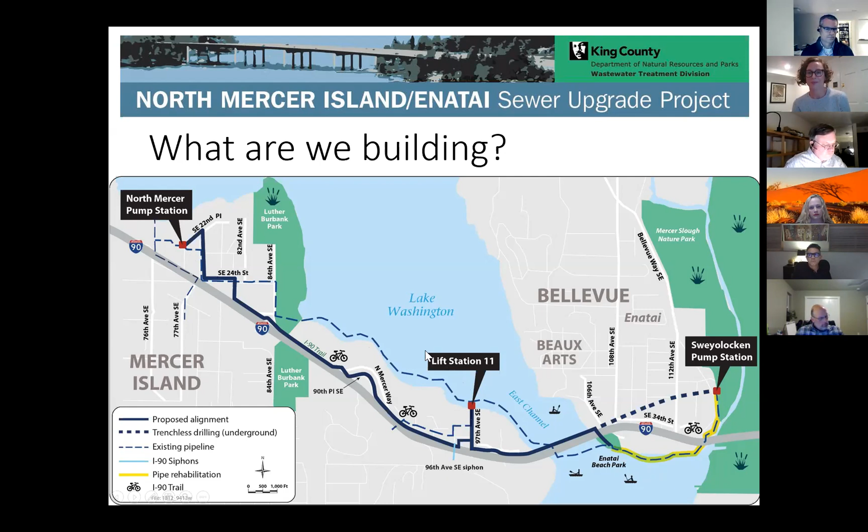We will be wrapping up final design first quarter 2021, and we are going to be advertising for construction in spring 2021. We anticipate having our contractors on board by fall of 2021, with construction running through 2025 into 2026.

Site zoning: King County has completed the lot consolidation process with the City of Mercer Island for our North Mercer pump station property. And I think that concludes the project overview. Andy, I will turn it over to you.

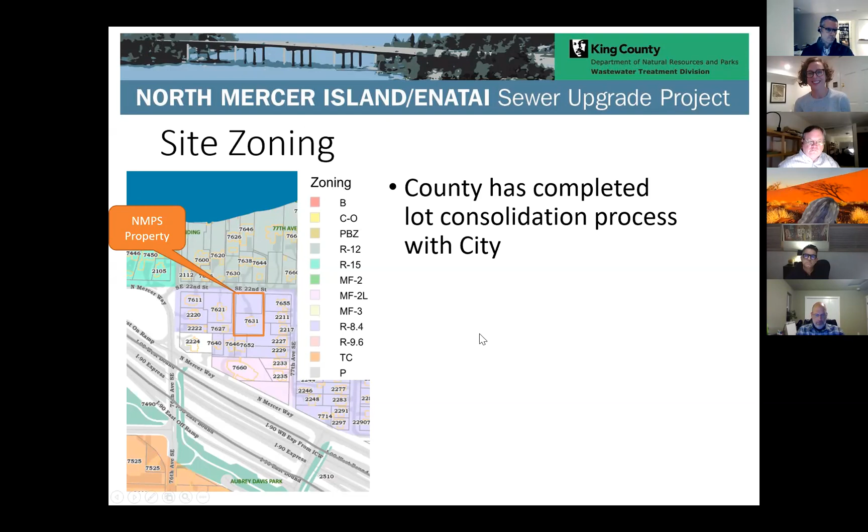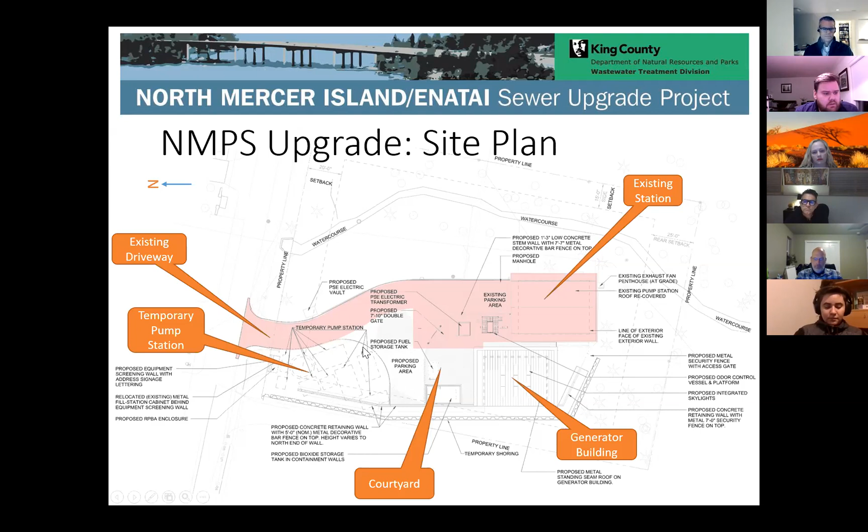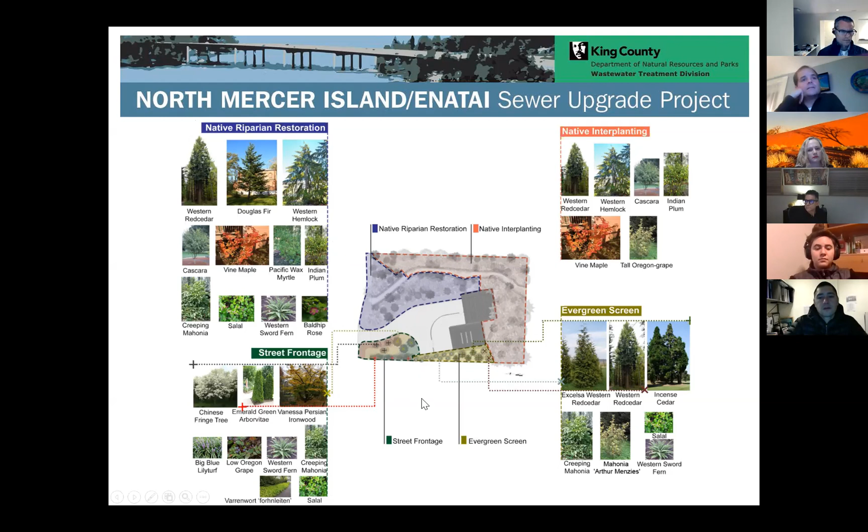We just list the plants by their symbol, and the board shows the plant selection used in the design, and gives some representative images to give you a sense of the character, the form, the look and feel for the different plants selected.

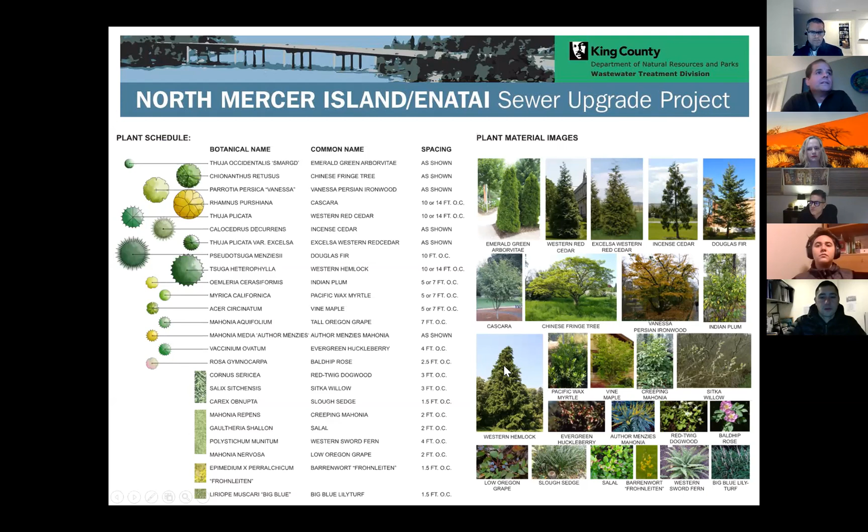And finally, James, the last slide, we have a diagram showing the site lighting. I want to point out the three different lights being proposed.

We have the yard light on the left, which lines the driveway. We have the building mounted lights in the middle there, and those go around the pump station and generator building. And lastly, we have these two small uplighting lights located in front of that entrance wall, providing a little bit of uplighting to make that visual sign.

And the last thing to point out, that red outline is the limits of the visible light. So this conveys that the foot candles are kept within the property boundary and won't spill out beyond that property boundary.

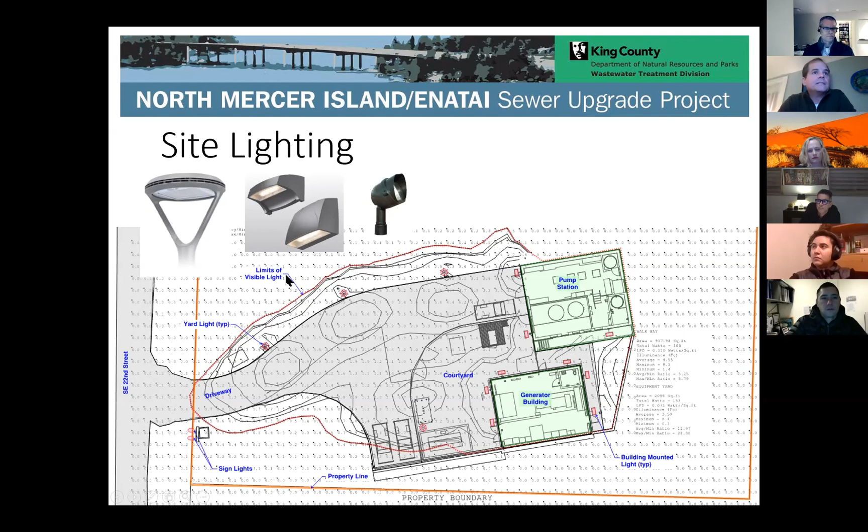And I believe, James, that concludes our hopefully short presentation to give you reacquainted with this project.

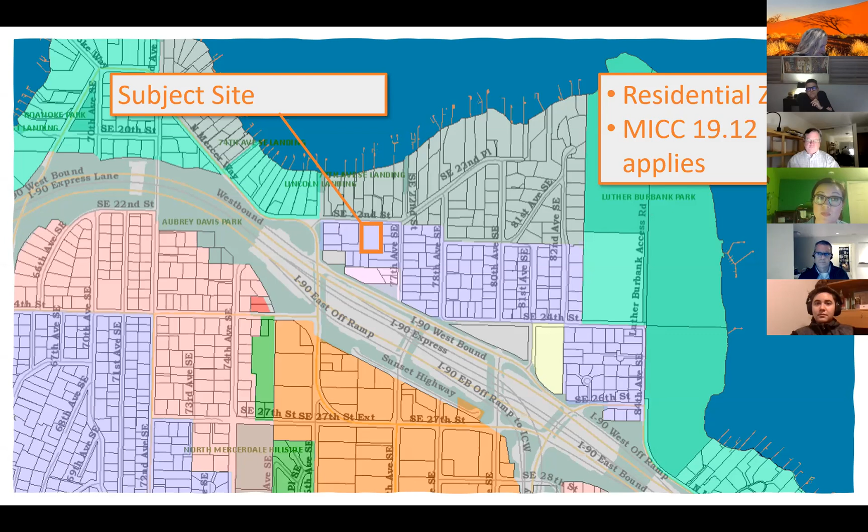The applicant did have a study session with the Design Commission last year, at which the commission offered feedback which the applicant has incorporated into their revised design. So again, it's Mercer Island Code 19.12 that applies in this case, and that chapter is organized by topic, with each topic having stated objectives, which read like principles or purpose statements, followed by specific standards.

Sorry, my cat always comes in at the worst time.

The code also states that where a code standard says a standard should be met, the specific standard is mandatory unless the applicant can demonstrate an equal or better means of satisfying that standard and the objectives of that section. Otherwise, if a standard says 'shall be met,' then that standard is just mandatory.

There are a few areas where the 'should' statement or the 'should' route was taken, for example, around standards related to outdoor covered gathering spaces, which are kind of an awkward fit for a utility building.

As described in the staff report, the proposed design meets all of the applicable design standards for this type of building. I've just summarized a few key topics here.

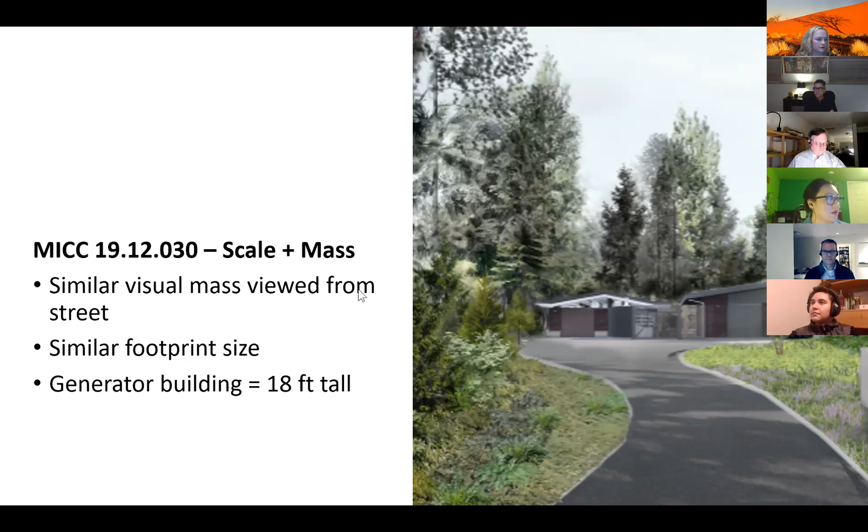Second, materials are required by code to be high quality and durable. They should be used with consistency on all sides of a building, and they should highlight architectural elements such as doors and windows. The proposed design achieves this by having durable materials like brick, patterned board form concrete, and metal.

There's roofing and then louvered metal proposed for the building. These are materials that do not degrade easily. They have a long lifespan, and a similar material palette is used for the generator building as on the existing pump station site, so that creates a consistent, similar look and feel.

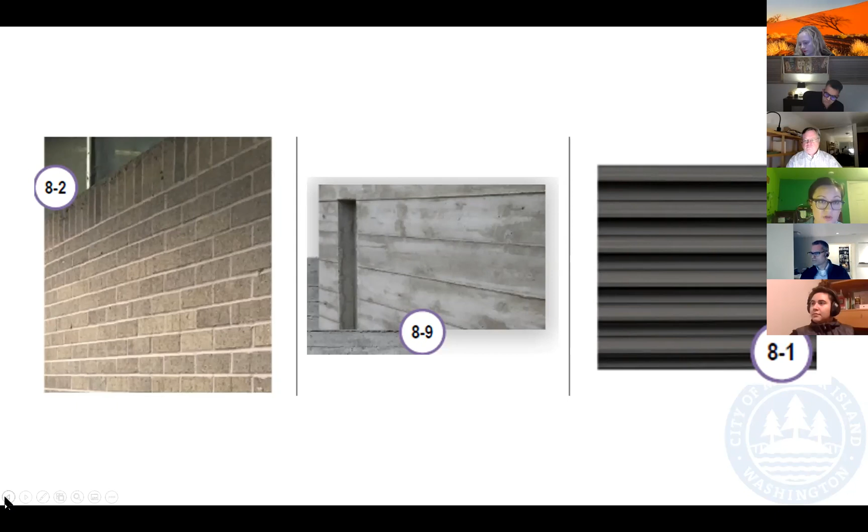The proposed materials are used on all sides of the proposed generator building as called for by code. And lastly, the materials are used in a way that highlights architectural elements of the building—doors, roofing—it breaks up the facade so that there are not large unmodulated blank walls.

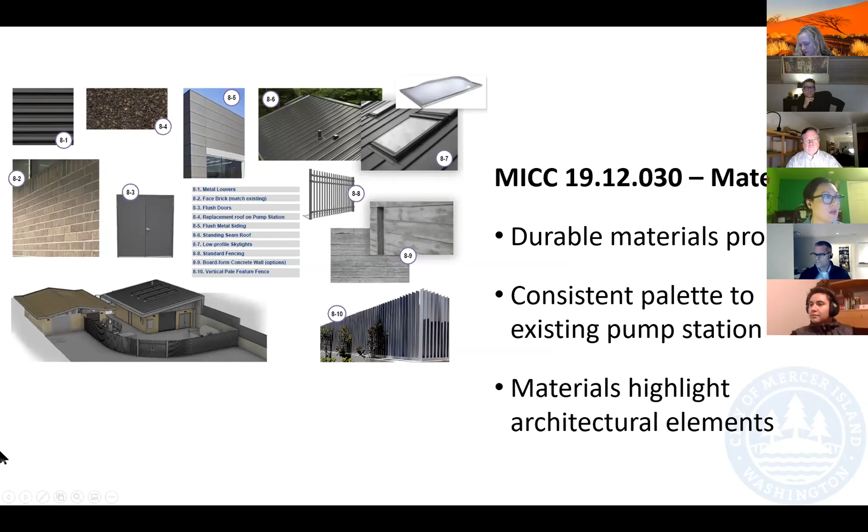The last item is screening. Screening is a requirement of code. In this case, when a utility use is next to a residential use, 20 feet of screening is required. This is another case where it's a 'should' statement, meaning that if the objectives of the code are met with an equal or better alternative to the standard, the alternative is an acceptable way of meeting the code.

In this case, the 20-foot standard is comfortably met on the east and south sides, which are on the top and the right here. But there's kind of a pinch point on this western edge.

This is in part due to the siting of the turnaround and the new generator building. The site has a water course on it, which is this blue streak up at the top. The proposed generator building and turnaround are sited to be as far away from the water course as possible, which is exactly what the city's critical area code requires. It directs development to avoid impacts to critical areas and generally be sited as far away as possible from critical areas.

To meet the screening standard, there's both that decorative fence described earlier proposed together with a dense line of coniferous trees. So together, those measures would create robust screening—not completely opaque, not a solid wall. It avoids that compound effect, but together they provide effective screening and satisfy the city's code standard for screening.

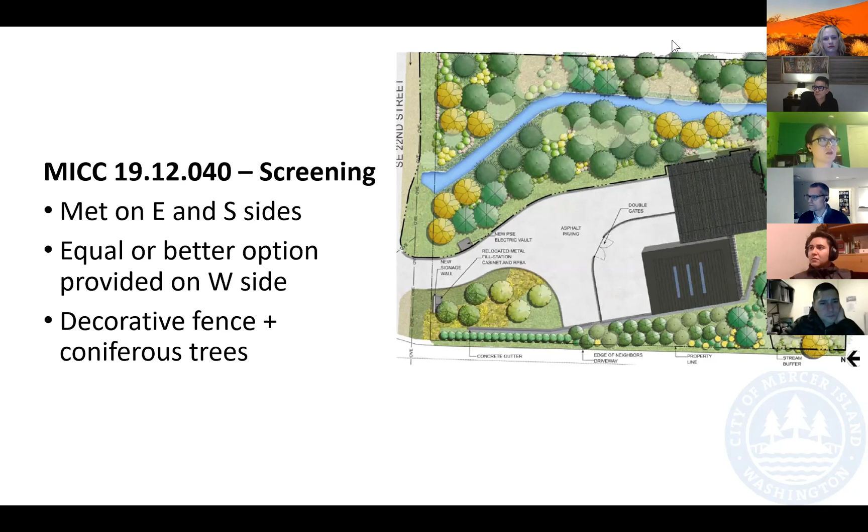Robin, would you like me to share my presentation? That probably makes sense, absolutely. Here you go.

You want me to take that question as well, James? Sure, Andy. Yeah, so this is Andy from Jacobs. Some of the images in here, we've kind of dropped the opacity of the materials a little bit to be able to see through on the renders.

You're quite right, with the viewing angles they're placed pretty close together, and they're quite a wide slat on the fence. So what we wanted to make sure is that as you're walking or driving past the site, you do still get those glancing views of the service yard area in its entirety. With it being on a radius as well, that's obviously going to help screen off to the sides a little bit more when you're looking at it straight on from the street. But it really is just those glancing views through it.

So as you kind of transition along the street frontage, this image shows it pretty well. This is viewing from slightly further to the east of the site. So this is on our driveway looking almost directly at the generator building at the gates. It really depends on the angle you're viewing this, the service yard area and the fence that's immediately in front of it.

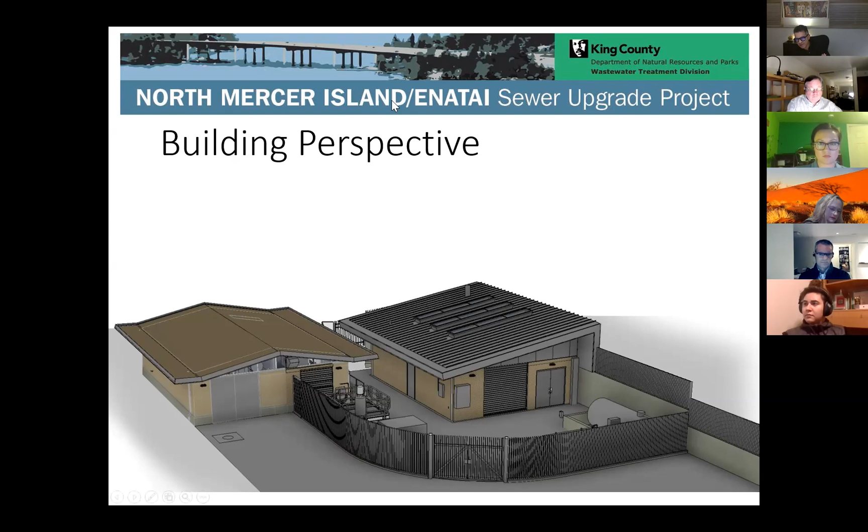What I don't quite yet understand is from the adjacent property - I think it's a 2-story house on the other side of the retaining wall - do they have a sight line to the roof of both the old and the new building at the same time? Is there an opportunity for a sight line? And if there is, I can't tell what the vertical height is on this render.

If it's 8 feet - looks like that's at grade. Right, no, that looks like it's taken from grade, not from a 2nd-story bedroom or something like that. That's what it looks like to me. It's really hard to tell.

But just if there is the opportunity or possibility for sighting from a 2nd story from an adjacent neighbor, is there an opportunity to have the roof colors be more closely matched? Not suggesting complete similarity or exact material match, but from the renders it looks like it's gray, even though it's called out as a bronze color on the standing seam, and then a ballasted type roof in dark brown. So just taking advantage of the design team being here to talk through that. Is it a rendering item, and do you think we'd end up with something fairly similar? So if we were to see this from the neighbor, would it feel more like one consistent presentation of roof materials rather than two individual buildings?

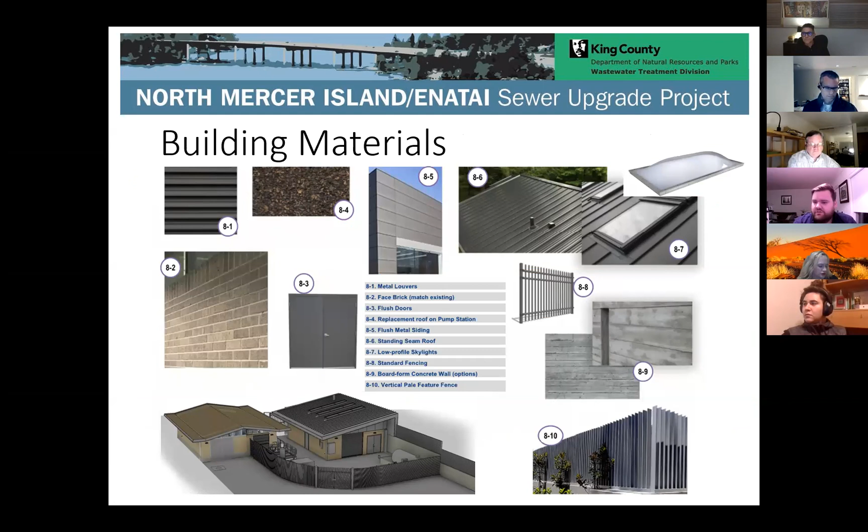So that is the intent - the next step on from this, when we get a contractor selected, is to actually look at physical materials and put them side by side and make sure we get material matches that are complementary to each other. And like you say, with the concern you raised, making sure we have that robust palette of materials with these earth tones and making sure they match up and work well together. Okay, great.

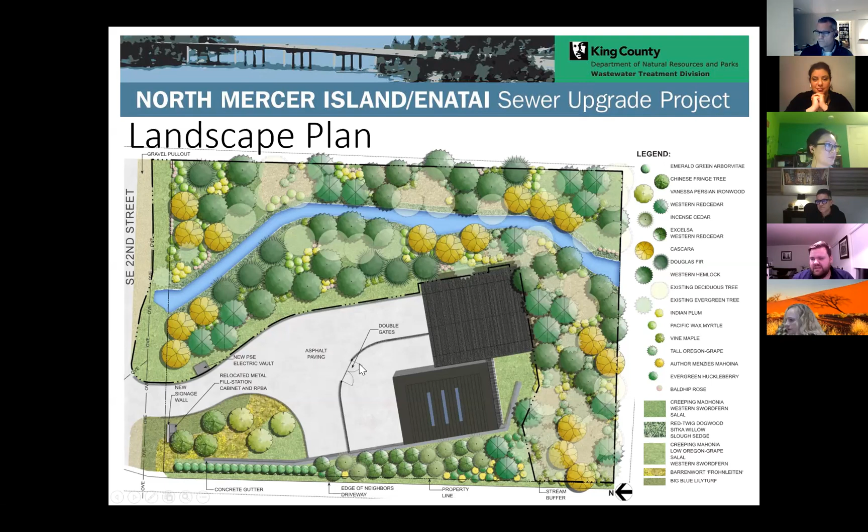No, sorry, the west property line. Got it, I'm just staring at some topo here. James and company, if you get to it quicker, please feel free to shout out the answer. Yeah, this is Andy - I was just looking at the elevation we cut through there.

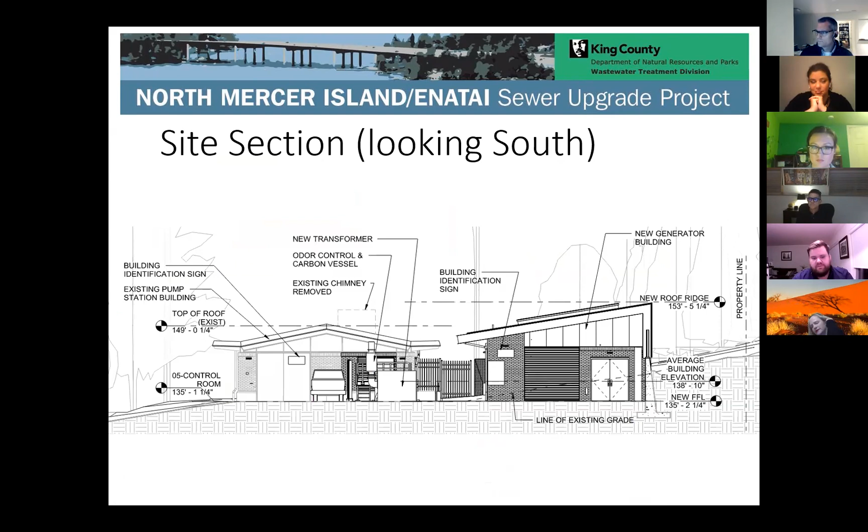So it's in the range of 6.5 feet at its highest point in terms of levels. The retaining wall will stand just above that, and then it feathers out, tapering down towards the street to a point where it's retaining just a couple feet of earth. When we hit the point where it's no longer required, we just dress the earth in that area.

And the top of that fence above the retaining wall - is it compliant with code relative to the base elevation at the lower side of the retaining wall? Does it have to comply with residential height? Off the top of my head, I'm not sure if it's specifically in the staff report because it's not a design standard, it's a zoning standard, but it will need to comply because it will also need a building permit. At that stage, if it hasn't been reviewed already, it will need to meet the zoning standard for the residential zone.

Robin, as far as I understand, we have received all comments from the building permit reviewers. Okay, excellent, good.

Can anyone on the design team side point out any difference or any design development that has progressed since the initial study session? In my recollection, it feels very similar to how the project was originally presented. Not to say one way or the other, but were there any changes?

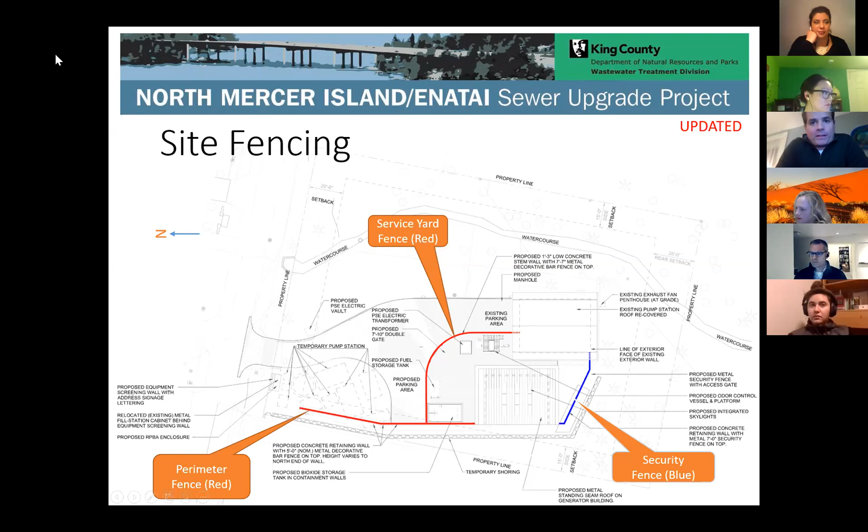This is Lorcan with the landscape architecture discipline. The biggest change since the last study session was coordinating with the neighbor to achieve the expectations for screening the western edge, critically looking at the density and size of that material to lessen the impact to his view on day one after installation. So from that perspective, that was the biggest change, from the revegetation and planting design.

This is Andy for the architecture, working hand in hand with Lorcan and with Mr. Sheldon as well. We adjusted some of the fence slat rotations on the top wall. There was a certain angle we were working at to improve screening, so we did a couple of exhibits for discussion with the neighbor to rotate, I think 20 to 30 degrees, that upper section of the fence line that immediately abuts the building where the roof turn down is. Again, just screening the service yard area from a particular angle that the adjacent neighbor was concerned about, complemented by the landscape screen as well.

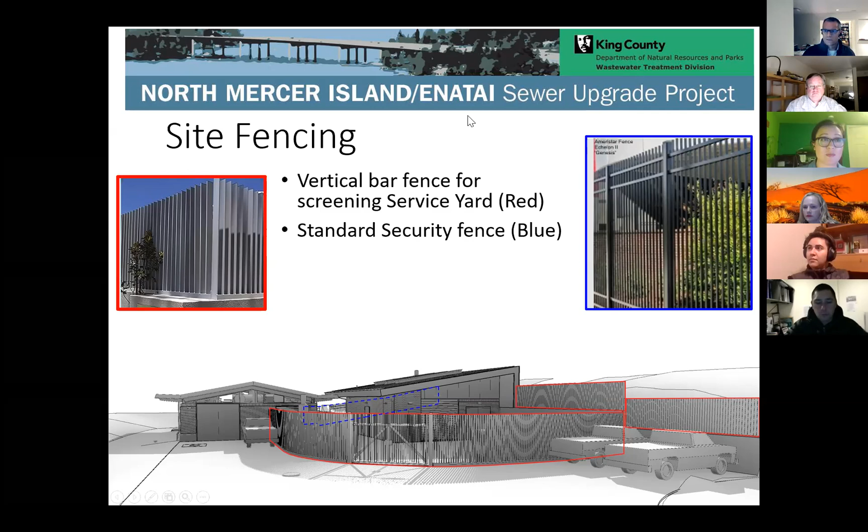I am curious to hear more from Mr. Sheldon about how he's feeling about this at the moment. I don't know if we can get him back, but I know he's got questions for us, and I have the same questions, so I'll go to this in just a minute. But anyway, I was just curious about his impressions of where things are.

I've got a couple of questions for the applicant as well, and one has to do with the construction time frame. I may have missed it, but maybe we could go back to it. My understanding, I thought I heard that construction was going to take 4 years. Did I get that wrong? No, you didn't.

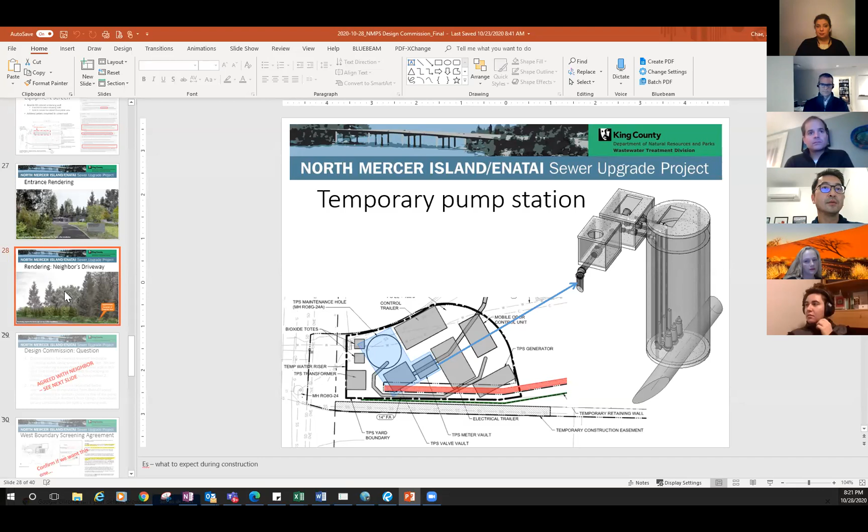Yeah, so this area, I think for the areas that are within city right of way, I think that statement is generally true, Meredith. But this area that I believe Commissioner Czar is talking about, this is obviously not owned by the city, but here's the property line right here. So this would be maintained by the county.

Absolutely, I'm sorry for that misstep, I was thinking of the project as a whole. Yeah, but for this area, I forget how long we are requiring for plant establishment, Lorcan.

Well, there's going to be 1 year under warranty, and then the county division who does restoration is taking over, and most of this property is within the riparian buffer that requires 5 years of maintenance and monitoring. There'll be temporary irrigation set up for 5 years to really provide that additional plant establishment, and it'll be maintained along with that riparian buffer actively for 5 years. At that point, it'll be turned over to King County operations.